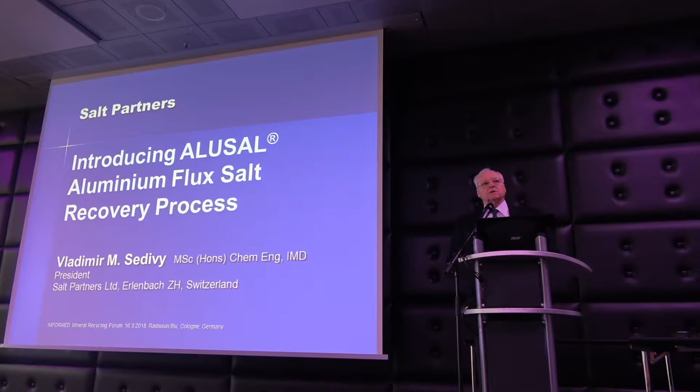Why ALUSAL? We have Hydrosal, we have Biosal, we have Cryosal, and we have also ALUSAL. ALUSAL is a process. We give these processes names because that makes it easier to communicate and keep track of what we are doing. ALUSAL is a process to recycle the flux salts. It's not only the sodium chloride, it's also the potassium chloride, and it's really the potassium chloride that makes the process either economic or not.

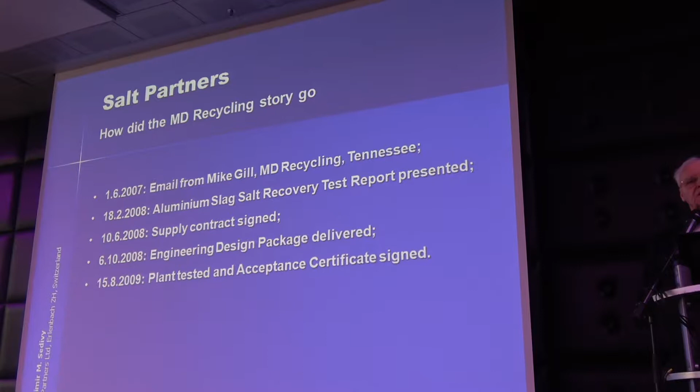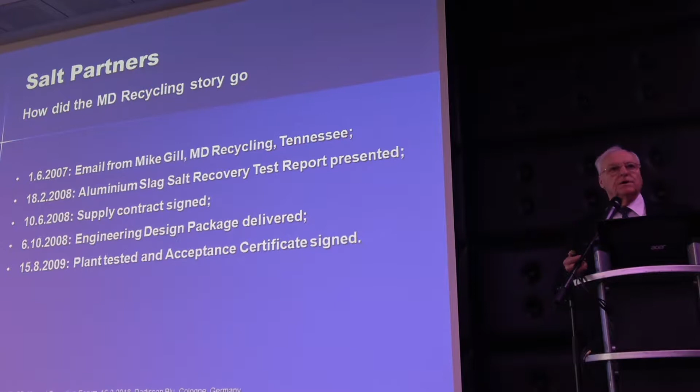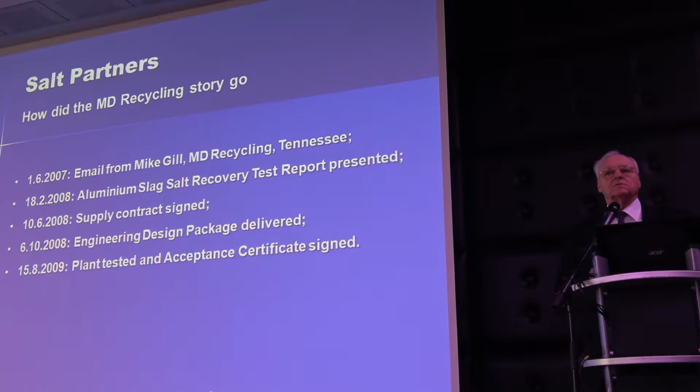This is the story. It started in June 2007. Mike Gill sent me an email. I thought, well, interesting. I spoke to him, and as we spoke, I thought, well, yes, I think our process could be applicable. Although the Hydrosal process is for removal, for extraction of magnesium salts and other impurities from salt, and the extraction is done with sodium chloride solution, with a saturated sodium chloride solution. Here, with this ALUSAL process, we want to extract salts from slag, from the dross. So it's an entirely different chemistry, but the principles are really the same.

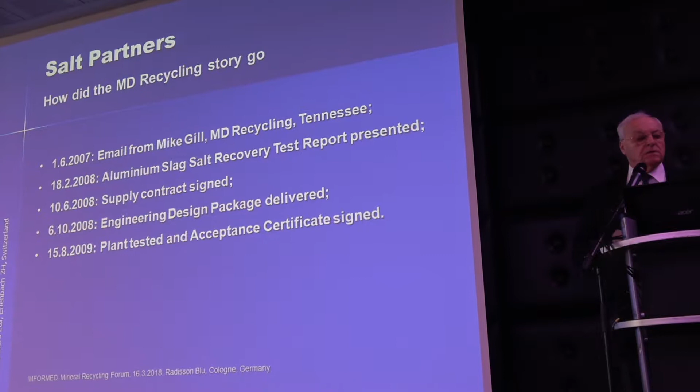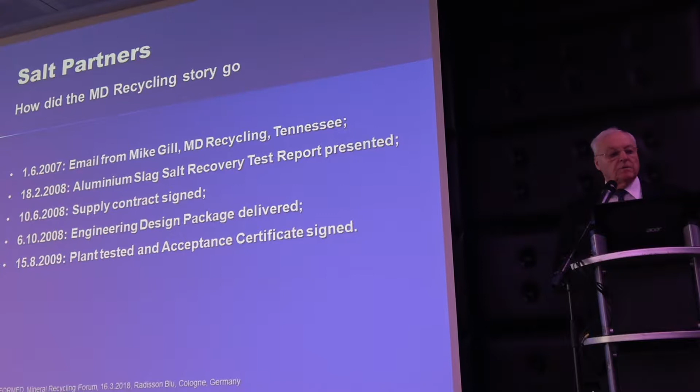So we have done some tests. In 2008, the contract was signed in June 2008, and the engineering package we supplied about 4 months later, and in 10 months the plant was actually built.

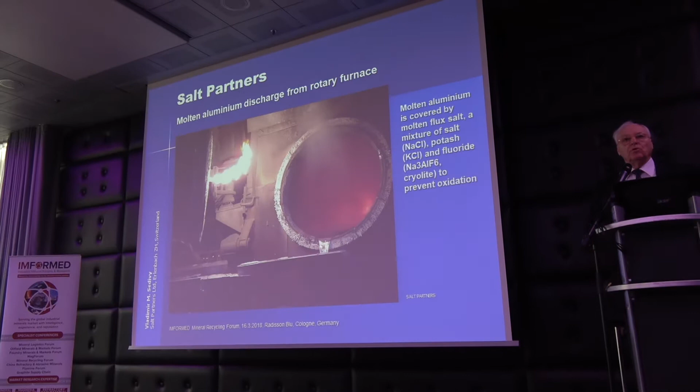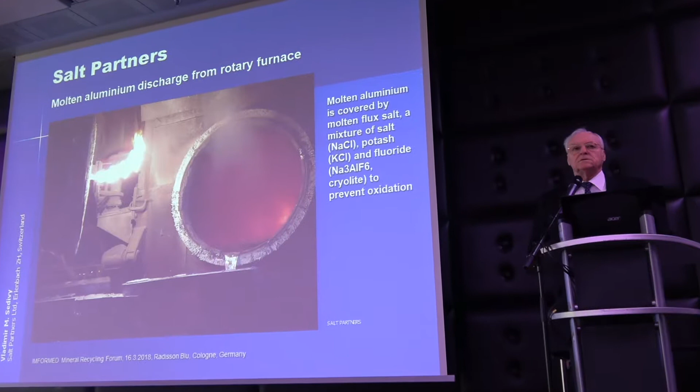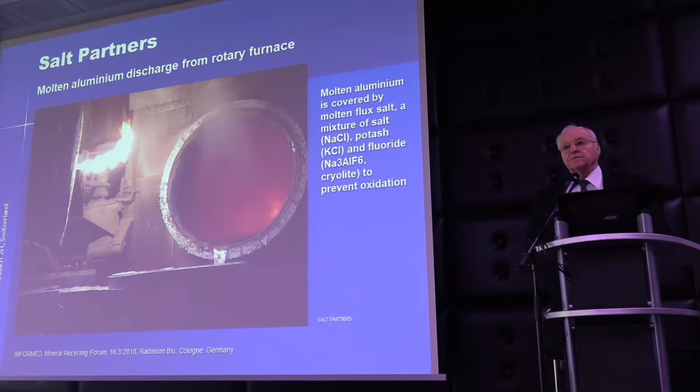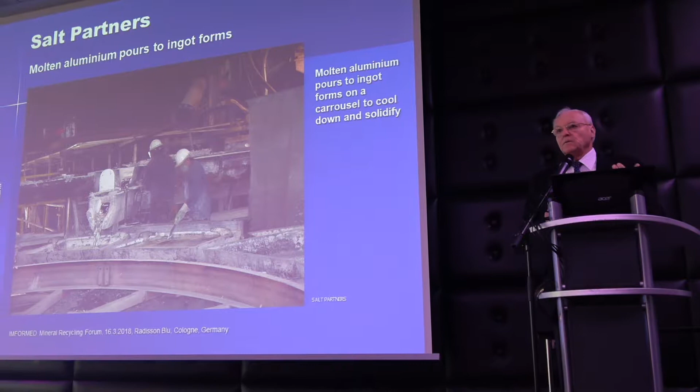This is a rotary oven. What we can see here is the molten aluminium that is being poured out. In the rotary oven, the rest, so the waste of aluminium, is being fed, is being molten, heated up, and to avoid the oxidation of the aluminium, it is covered with a mixture of sodium chloride and potassium chloride, plus about 3% of the cryolite, the fluoride. After the aluminium is poured out, this shows how the aluminium is being poured into the forms to form the ingots.

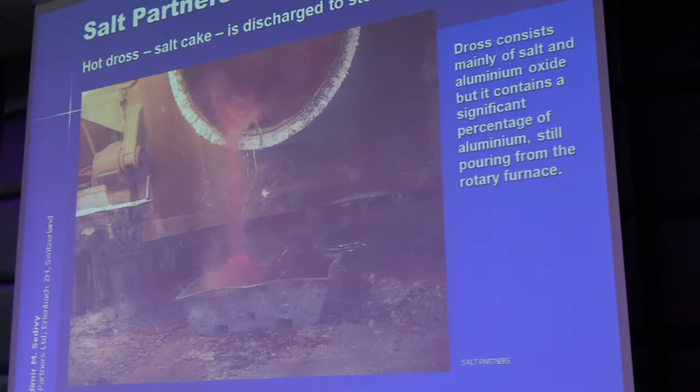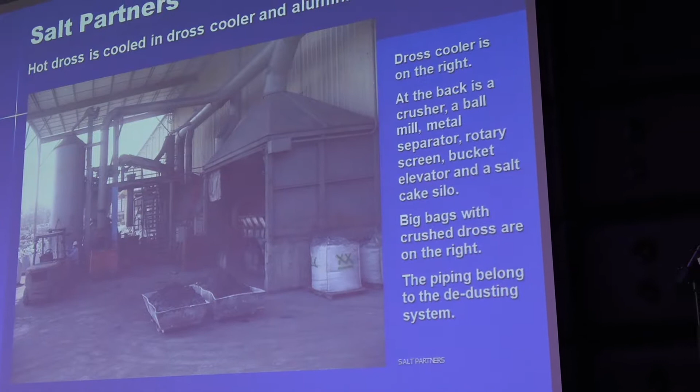After the aluminium is poured out, as much of it as possible, the hot aluminium oxides, or the dross, is being removed. And as you can see here, there is still some aluminium in the dross. So what is then being done with it is that the dross is thrown into a cooler. It is then crushed and screened. The larger pieces of aluminium are removed and recycled, and then the dross is left.

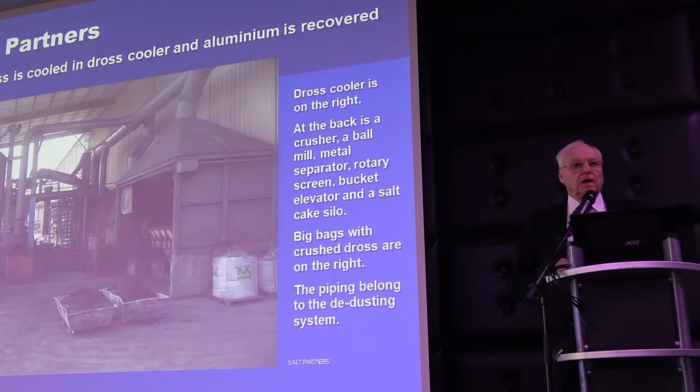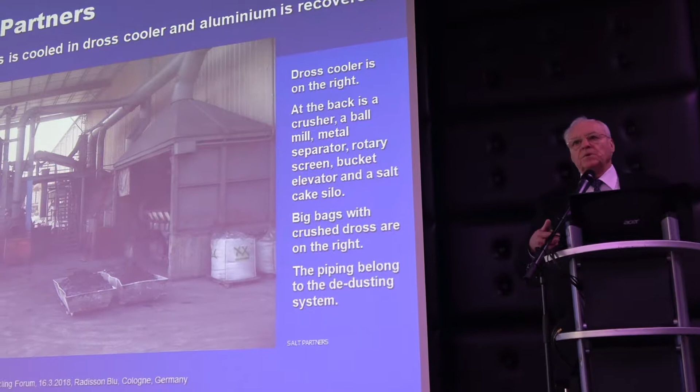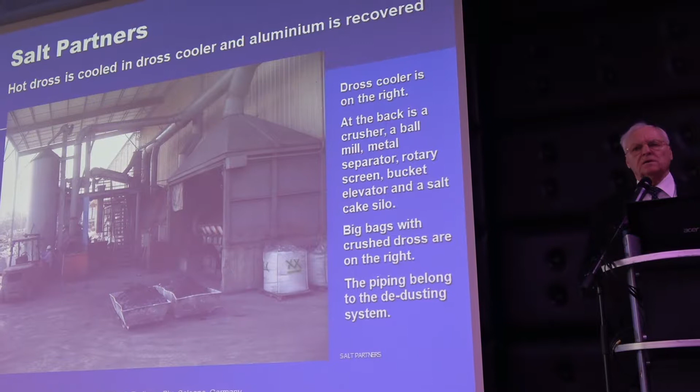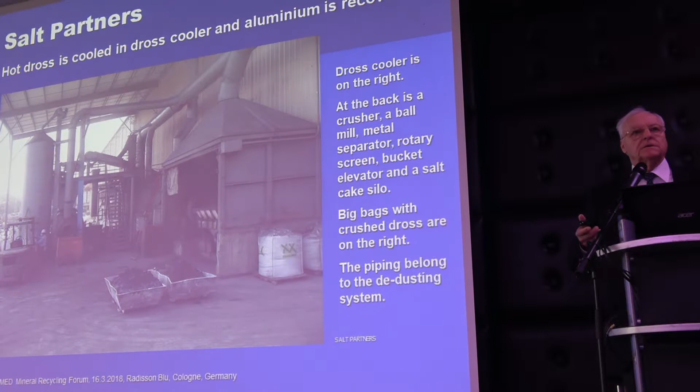Now the dross is a slag. It consists of about half of the salts and half of some aluminium oxides and other ashes, remainder of the beer and Coca-Cola that still was in the cans. Now, the very unpleasant thing about this dross is that when it gets wet, it begins to smell terribly. Not only ammonia, but all kinds of other very, very unpleasant smells. So to dispose of it is difficult. It has to be disposed of dry, and it's an expensive story.

On the other hand, half of it consists of the salts, and of that, half again is the potassium chloride. Around 2007, 2008, when this project was conceived, the cost of potassium chloride was on average $700, and the peaks reached up to $1,000 per ton. Salt, sodium chloride, was delivered dry, perhaps at 50. So it's not the sodium chloride, it's the potassium chloride that is important.

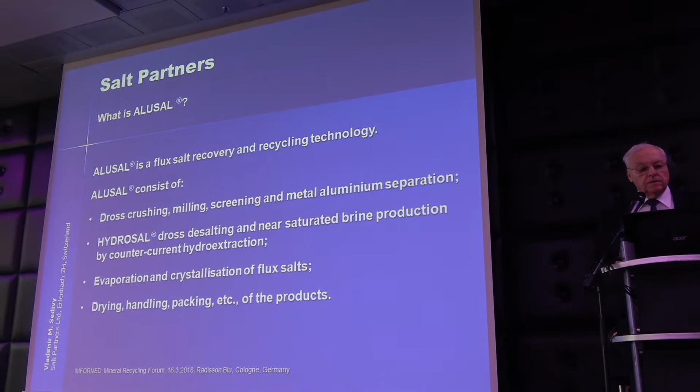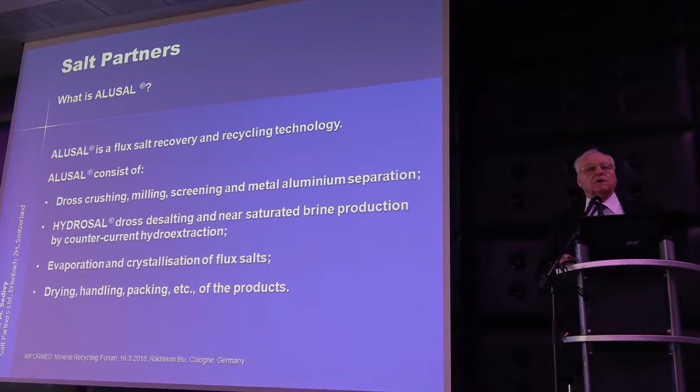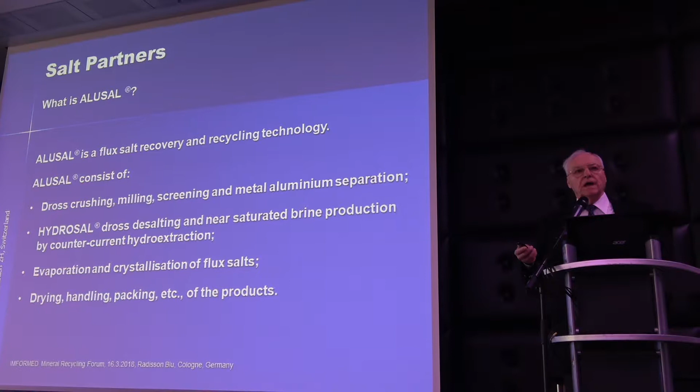First of all, the dross has to be crushed, milled, screened, and the metal aluminium has to be separated. For each one of these unit operations, you can either use something rough, as it was done here, or something more sophisticated. For example, the crushing and milling can be done in phases, producing much less of the very fine dust that is unpleasant. Also, the metal aluminium separation can be done just by screening, or even by some eddy current separators. The HYDROSAL process is the key of this process.

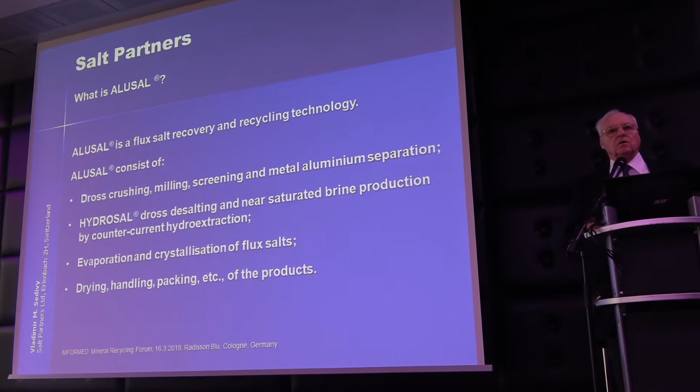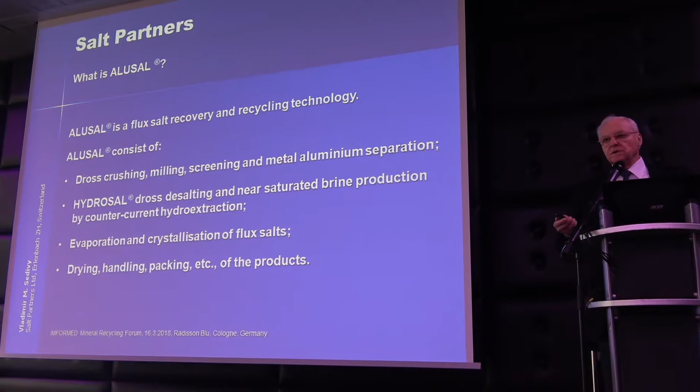The problem with washing or leaching of salts from some solids is that you can't do it to the final point. You mix the dross with water, the salt dissolves, but there is still some salt left, so you separate it, then you have to re-wash it. You are again producing a diluted solution of the salt, and the dross still contains some salt.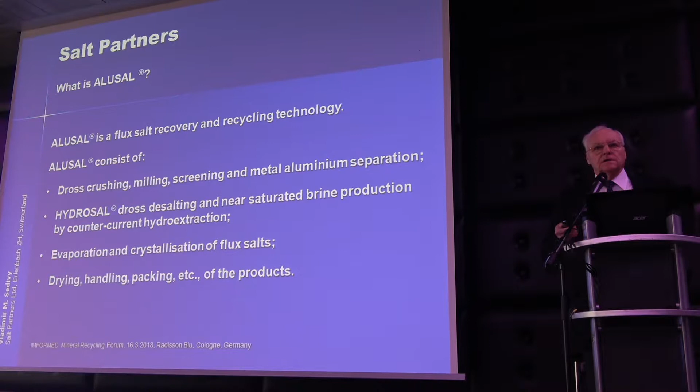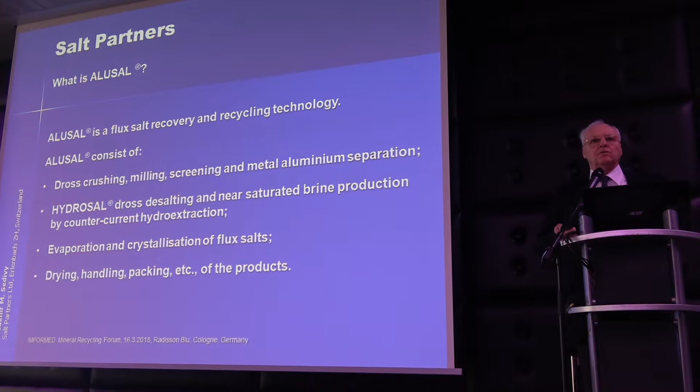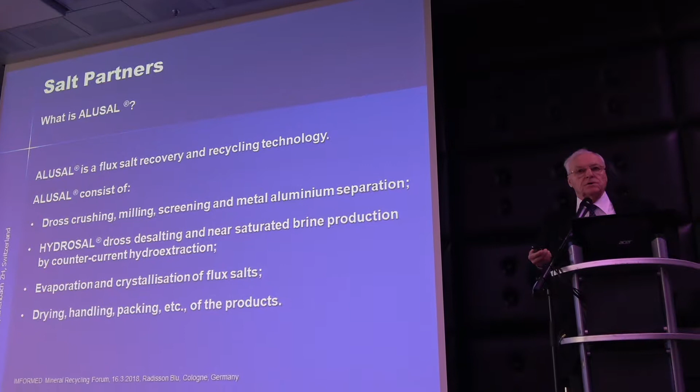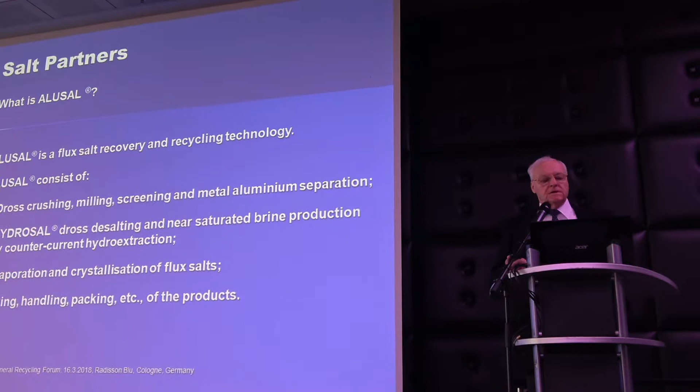So we said our countercurrent continuous process should be capable of, on one hand, producing a really salt-free slag, and on the other hand, producing a near saturated sodium chloride solution. The solution then goes to an evaporator and crystallizer, and if the solution is diluted, you have to first evaporate water before crystallization starts, which makes the whole process much more expensive. It's mainly the steam or electricity consumption taking place here.

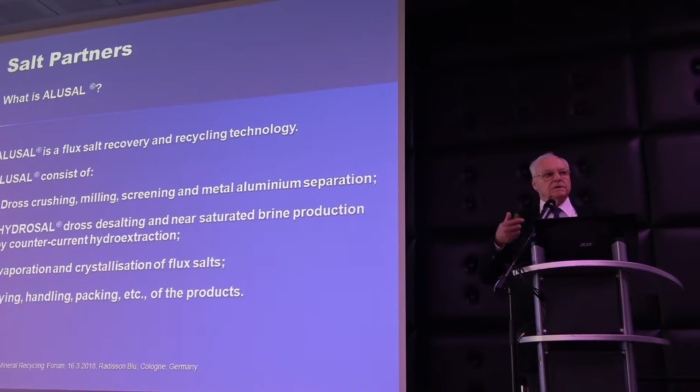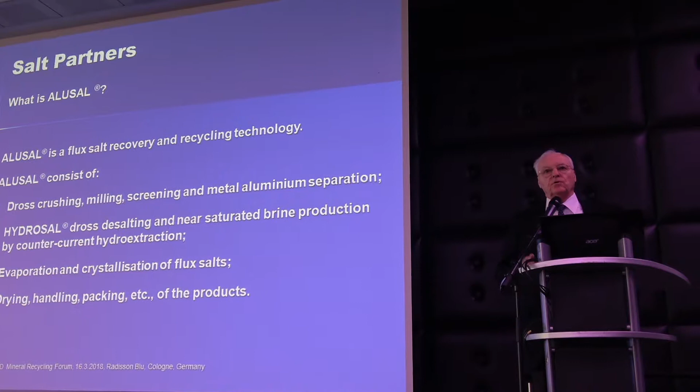And then, of course, we have the slag that needs to be dried, packed, delivered, sold and marketed, and also the flux salt has to be dried and made ready for use in the ovens. The HYDROSAL is a countercurrent process that can do this job, and this is what we have done here, and what was actually successful.

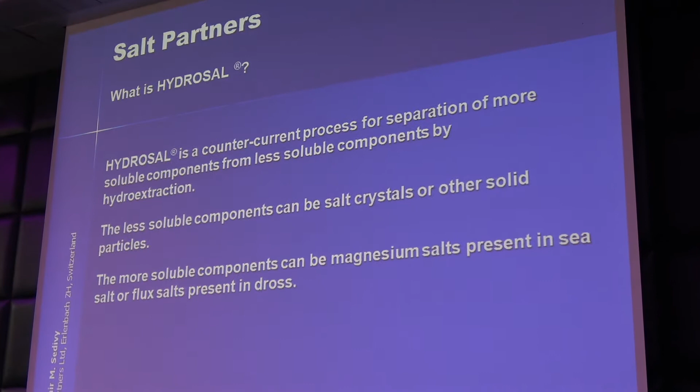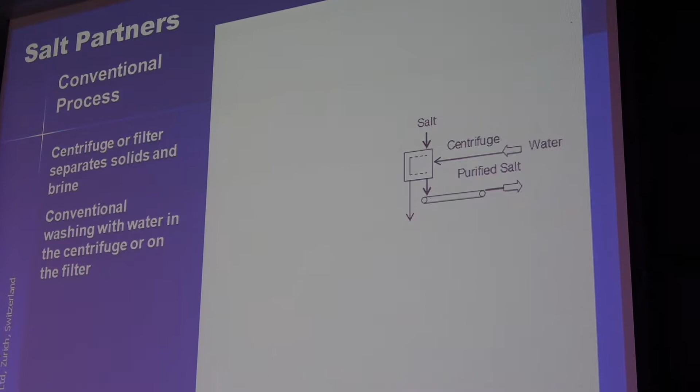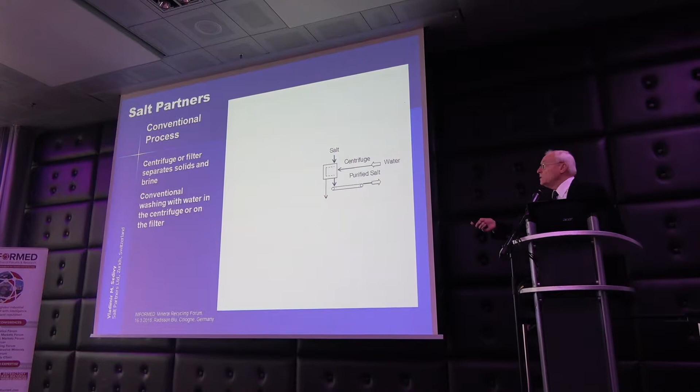Now let me explain how this process works. A conventional process is that you mix water with some solids, dissolve what is soluble, and then separate it, for example in a centrifuge, but you can also use a filter for that. You get, on one hand, the feed, shown here as the salt. Then you put in the water and you get the purified salt, or here in this case, the purified salt-free slag.

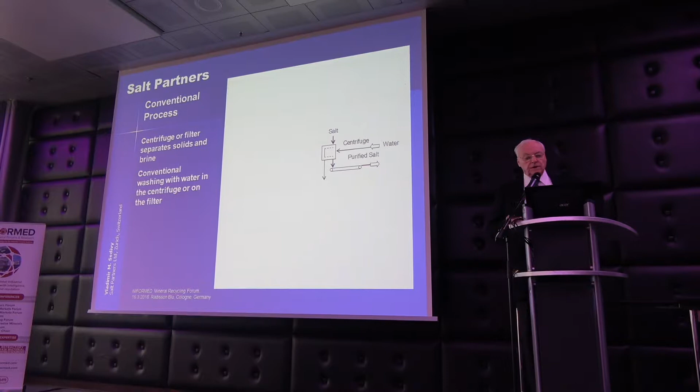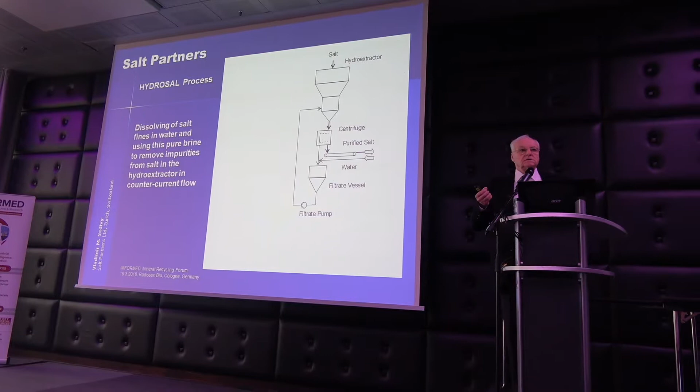Now the principle of the HYDROSAL process is that you actually do not put the water into the centrifuge or onto the filter. You put it into a filtrate vessel where you dilute this filtrate, and any solid particles present in this filtrate are then dissolved, and this pure solution of the salt is then used for the hydro extraction.

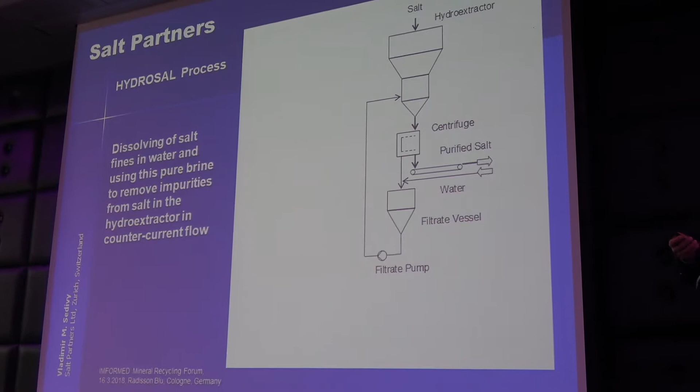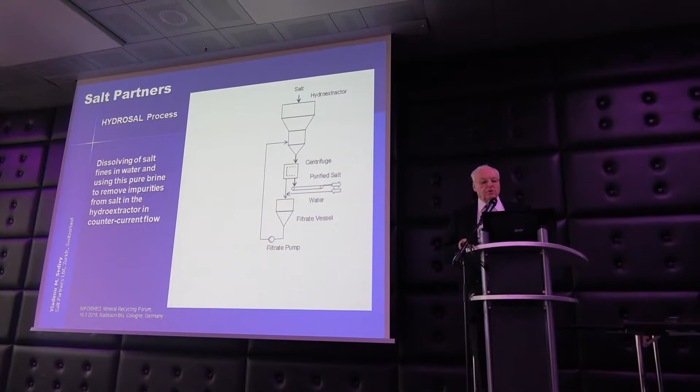In this case, in the ALUSAL process, it would not be the salt that is dissolved in the filtrate vessel, it is the pure water that comes out at the end of the leaching process and is being recharged to the hydro extractor for the leaching. The leaching actually takes place only in the lower part of the hydro extractor, here, where the countercurrent flow of the solids against the flow of liquid upwards takes place.

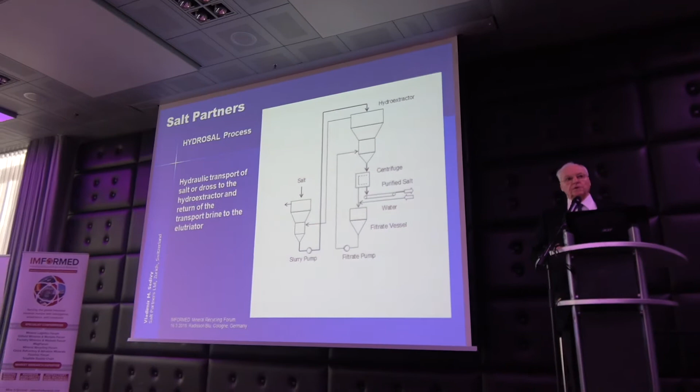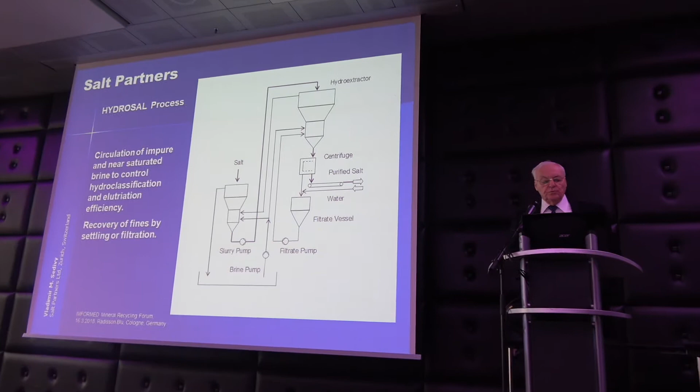Then, of course, we have to get the material somehow to the hydro extractor. This is what we do with hydraulic transport. We mix the salt with the overflowing brine and pump it to the top of the hydro extractor. Then, to close the loop, the overflow from the elutriator flows to a settling pond, from where we pump the brine back to the hydro extractor and to the elutriator, to adjust the countercurrent flow the way that we require it.

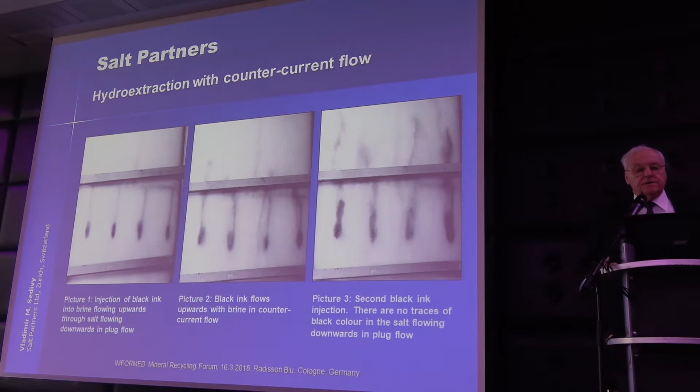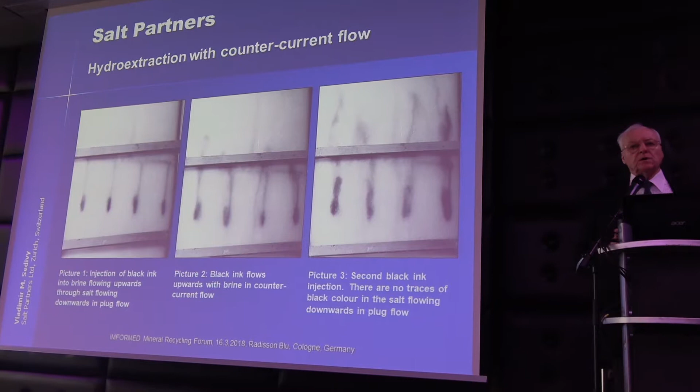This shows some development of the countercurrent. The countercurrent is not easy, it's actually rather difficult to do, because if the conditions are not correct, then the countercurrent flow goes by channels, causing channeling of impurities with the solids in the downflow, and a bypass through channels of the upflow. What you see here white is salt, solid salt crystals flowing down, and the black spots are brine colored with black ink to make it visible.

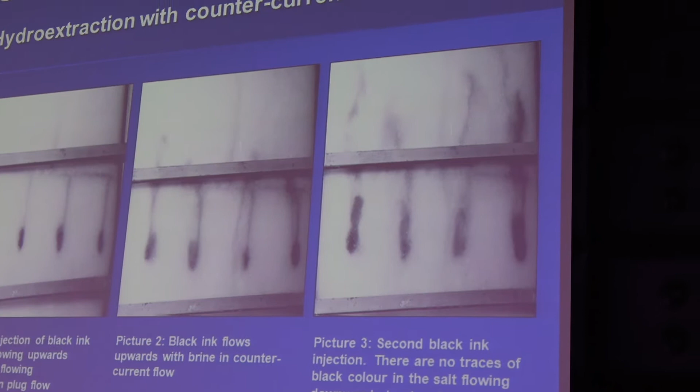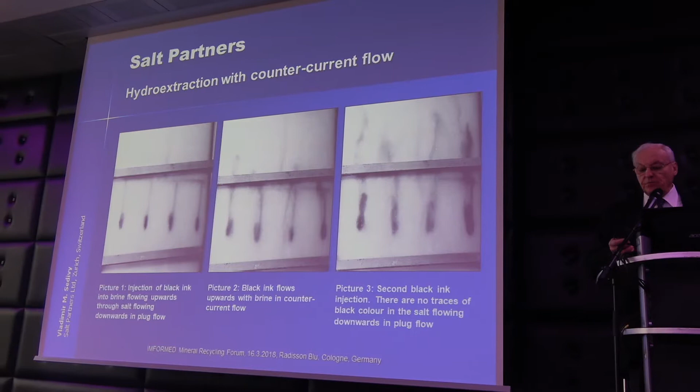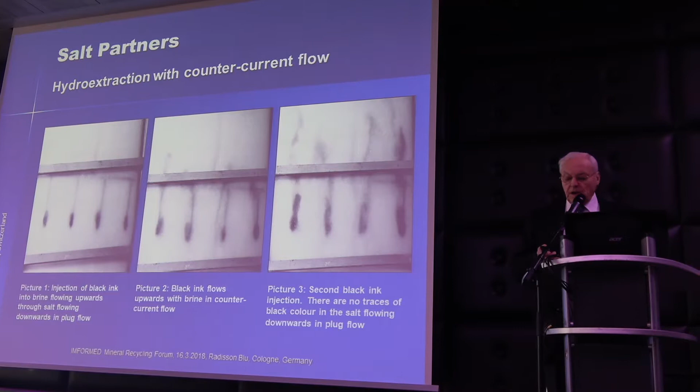So what you can see here is that first of all, the black brine flows upwards, here and here. Below the injection point of this black brine, you do not see any black brine at all, it is all moved upwards. And then you can see there is some diffusion of this black brine in the upper section, here. So you need a certain height, a certain elevation.

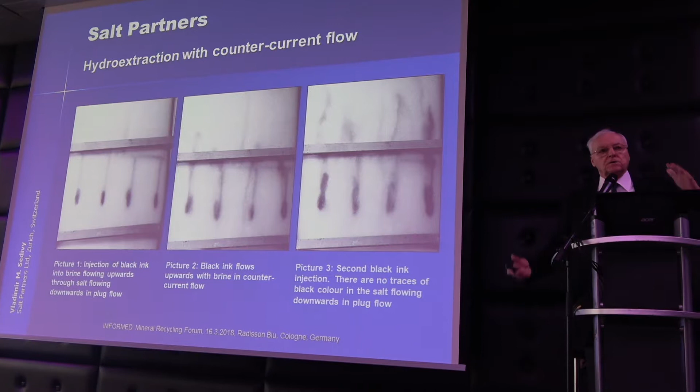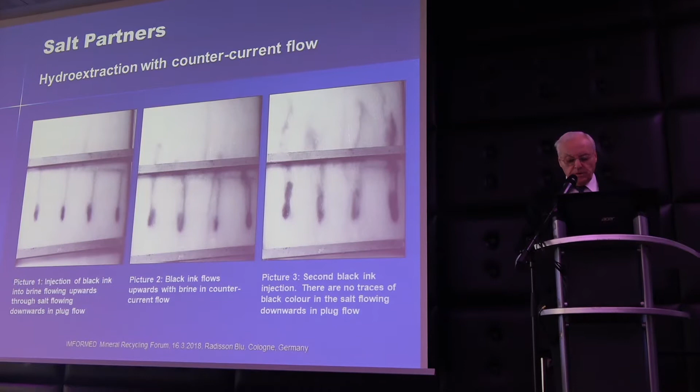It's like distillation. In a distillation with a packed column, you have theoretical trays, and you need a certain number of these theoretical trays to really get the heavy liquid down and the light liquid up. So these are the chemical engineering principles of the process, the most important one. There are others that I am not going to discuss.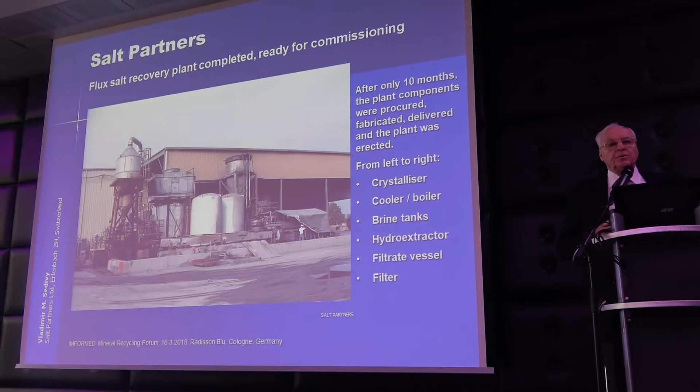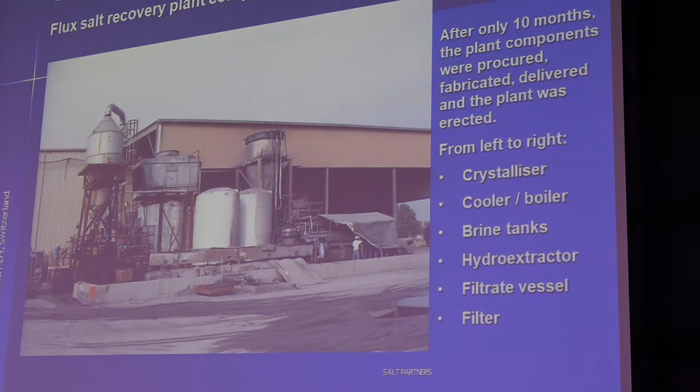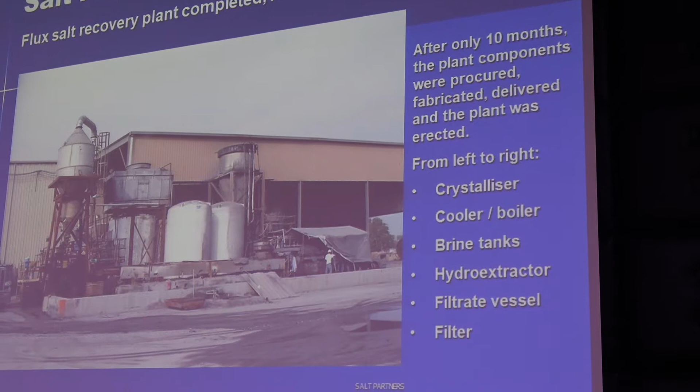Now this is the completed plant. It consists of the cooling and the crushing that you have seen in the previous picture, that is here. Then you don't see the elutriator, but you see the hydro extractor, this one, it's pretty high, for the reasons that I explained before. You can see the filter.

You can see the brine tanks. You can see the cooler and the steam generator, and the evaporator crystallizer.

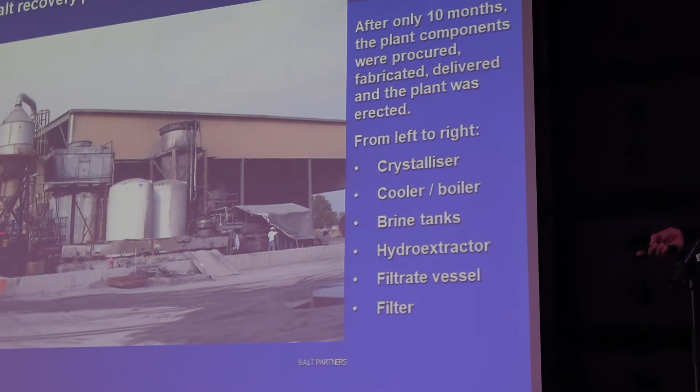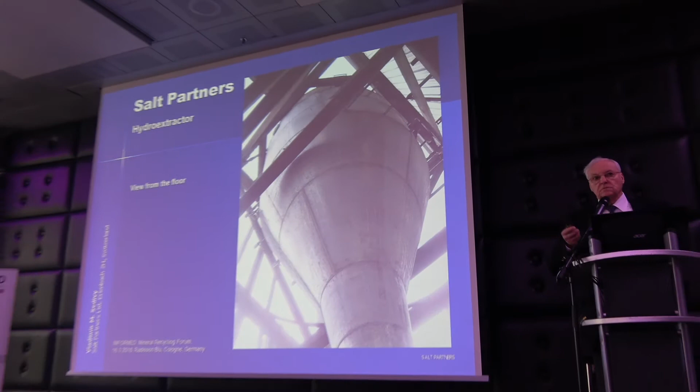Right, this is the hydroextractor. You have seen this picture on the handouts that I've distributed to bring home. This is how we have been examining what's inside, where are the solids and where is the liquid. You don't see anything, it's all just black and grey—a very messy thing.

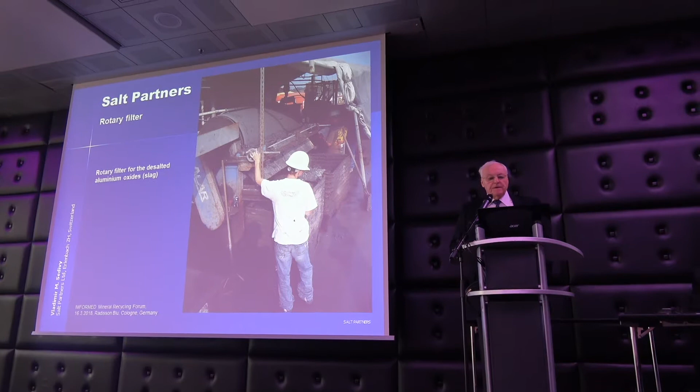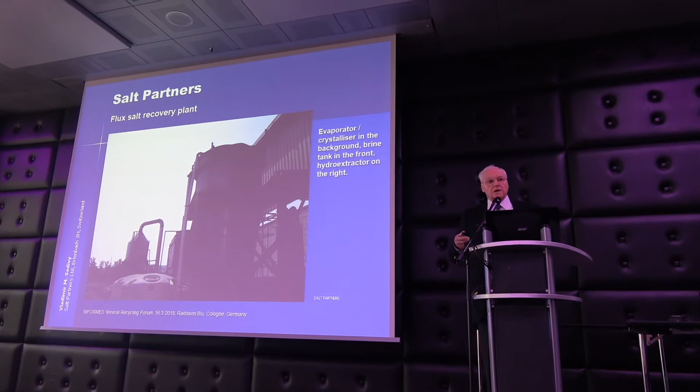This is the filter for the filtration of the desalted slag. The brine tanks, the hydroextractor. You can see the particular funny shape—this shape is necessary to break the channels and make the hydroextractor work.

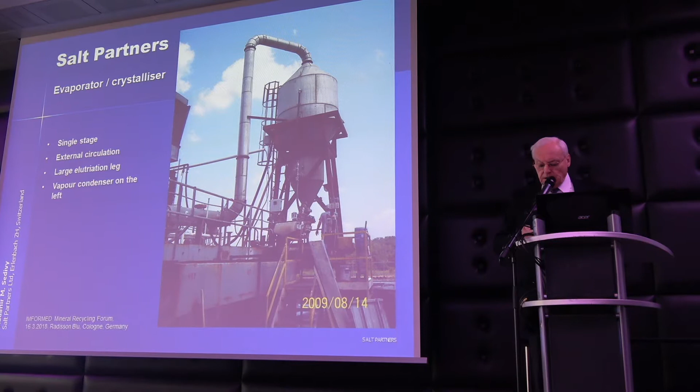In the background you can see the evaporator crystallizer with a rather oversized solid discharge of the crystallized solids. Here, this is where the crystals are drawn out—the evaporator body, the vapor line, and the condenser. Condensate is then fed to the steam generator, and steam is produced to heat the evaporation process.

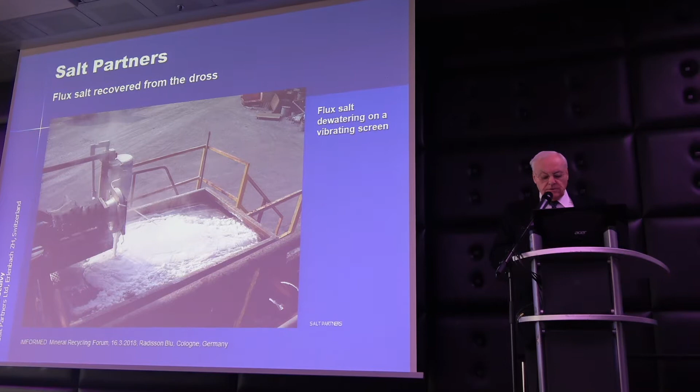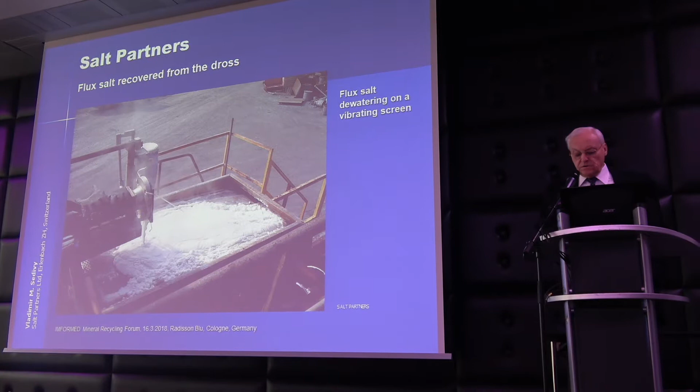This is the outlet of the crystallized salt, sodium chloride and potassium chloride, on a vibrating screen. It was a very good decision, instead of using centrifuges, to use this vibrating screen for partial dewatering, because the residual water evaporates immediately in the rotary kiln.

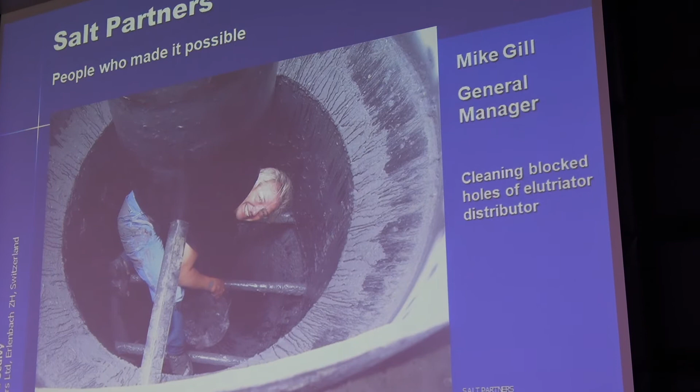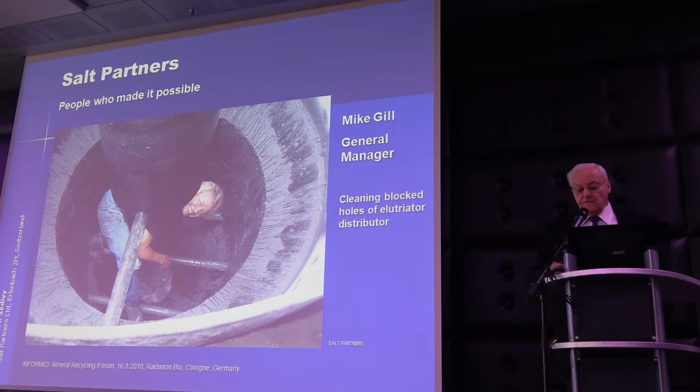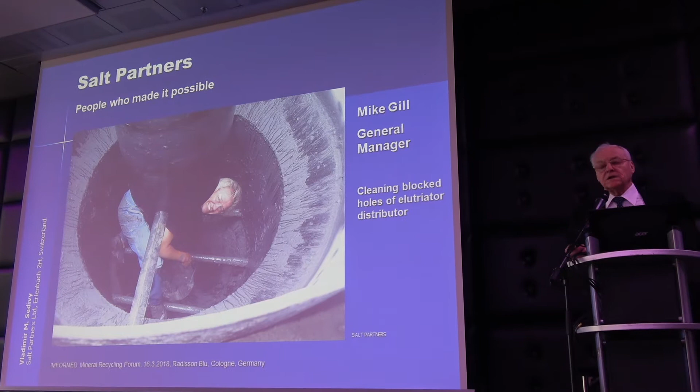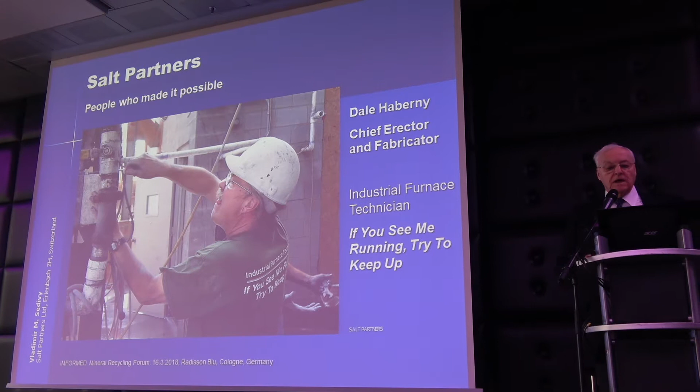This is Mike Gill, the general manager, cleaning the distributor. Rough guys, very, very rough guys. I think most of our environment, safety, security and health officers would—well, their hair would stand up. But it was done very quickly, there was no accident, because the boss did the most difficult part of the work. And this fellow, Dale Haberny, he was a genius.

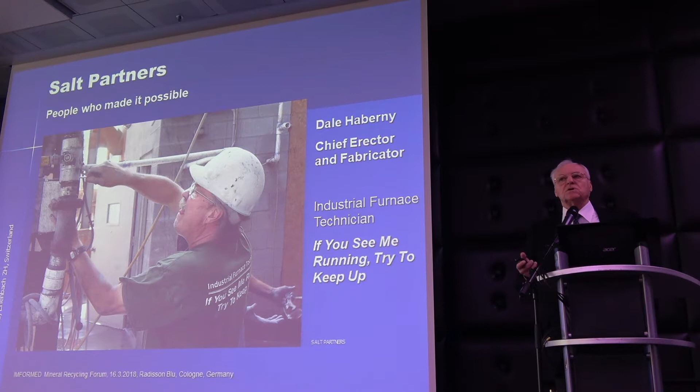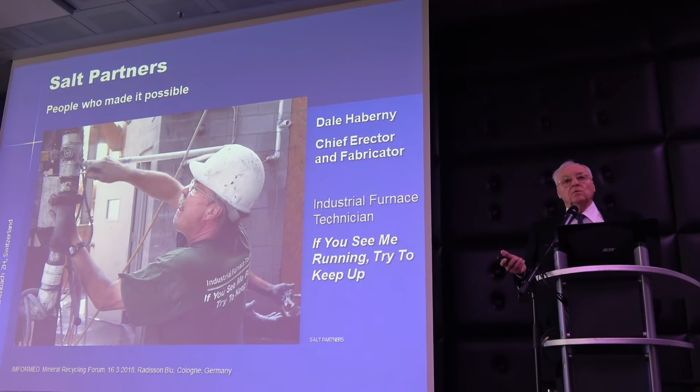We supplied the basic engineering package. He gave me a call, asked a question: in the basic package, the sketch of the hydroextractor shows 4 distributors, but the specification says only 3—which is correct? I said, well, the sketch is general, the specification is specific, so it's 3. So he put in 3, and that was all. I asked him, when do we get the drawing for checking? He said, oh, we'll make the drawings perhaps afterwards. A few months later I was called for the startup of the plant. So he built the plant without drawings, just on the basis of our sketches and specifications. Genius.

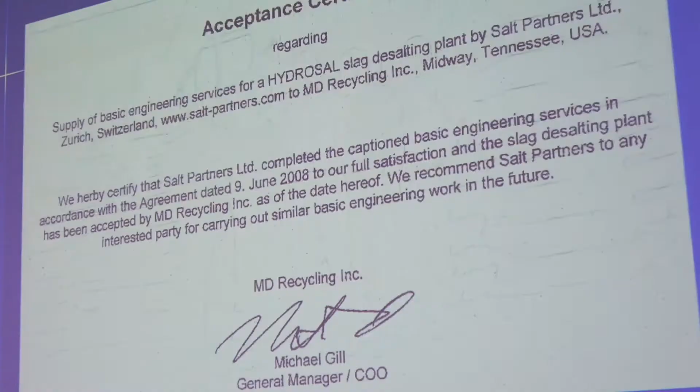So, if you have a problem with salt, why don't you turn your salt into gold? Gentlemen, ladies, thank you very much for your kind attention.

So you mentioned some magnesium salt extraction—is that possible? Well, yes. What are the results of that? Most of the plants we have built were built for purification of sea salt, solar sea salt. Solar sea salt crystallizes from the so-called bitterns, which consist of magnesium chloride and magnesium sulfate, and the other portion of the salt is still sodium chloride. Now pure salt, whether for caustic chlorine production or for human consumption, must not have the magnesium. So the magnesium salts are removed by the HYDROSAL process from this salt by the hydroextractor. The salt is not a clean, clear, homogeneous crystal—it has crevices and cavities, just like most slags have. The removal of these more soluble salts from the salt, and in the ALUSAL case from the slag, takes time because it goes by diffusion—it has to come out from the crevices. So it needs time, and that needs equipment of the appropriate size.